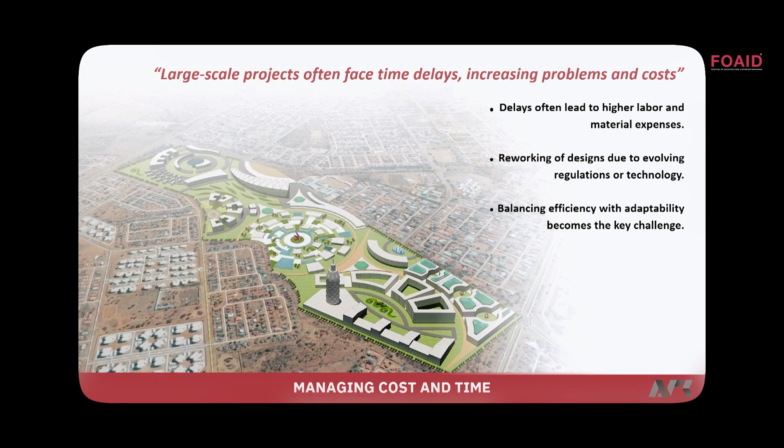Large-scale projects often encounter delays because you've got to go through environmental clearance, a lot of approvals, and during the project itself there's a lot of change. The bylaws change—like the project we were doing, it was in the old DCR, and then UDCPR came in, and we had to change the entire plans.

Because of market demands also, projects have to be reassessed and re-looked at. And whenever you design, you have to keep in mind flexibility. If you have flexibility, you can do the project.

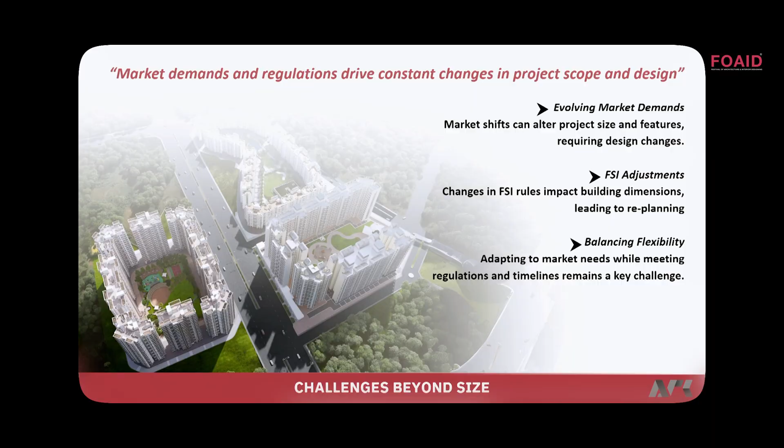The other thing that happens in many cases is you construct something and it gets built, but it doesn't get used for the same purpose. There have been projects where we've done a commercial building and it landed up being a hospital, a school, or a hotel. So you have to have flexibility when you're designing.

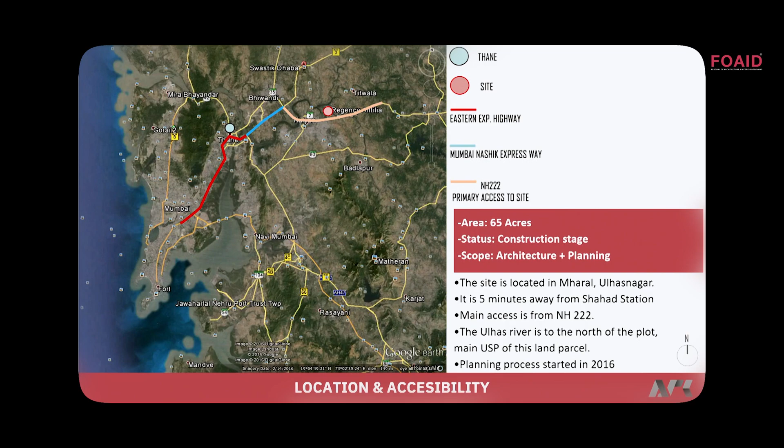This is a project I was talking about, we started this in 2016. It's in Ulhasnagar, actually, away from Thane, on the NH 222, by the river Ulhas. So the site was an excellent site—it's a 65-acre site, and the main thing is the river, a beautiful river.

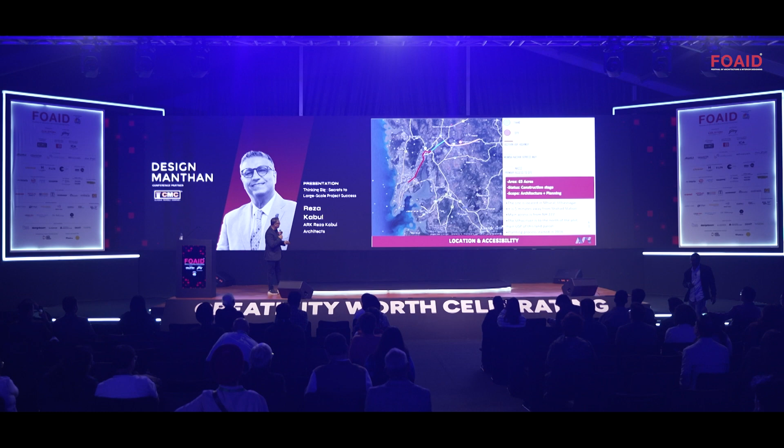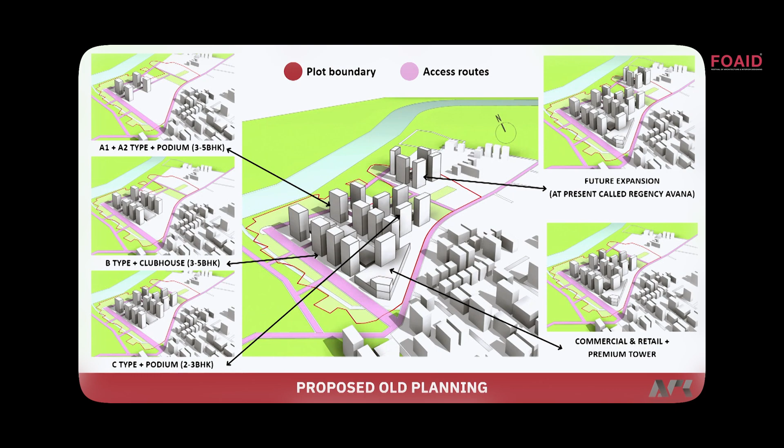When we got into the project, there was a challenge again because it's on the river—we had to leave a buffer zone for the high tide. We looked at the 50-year river high tide, and then we started designing. We had to leave a buffer zone of about 40 meters, and then we started doing the master plan.

So it's a mixed-use complex, and we have residential, commercial, retail, a school, places of worship, and a clubhouse that is 150,000 square feet.

This was the master plan when we started, and this is the clubhouse that is now completed. These are the roundabouts, the thought process and everything that was there, and that was the master plan.

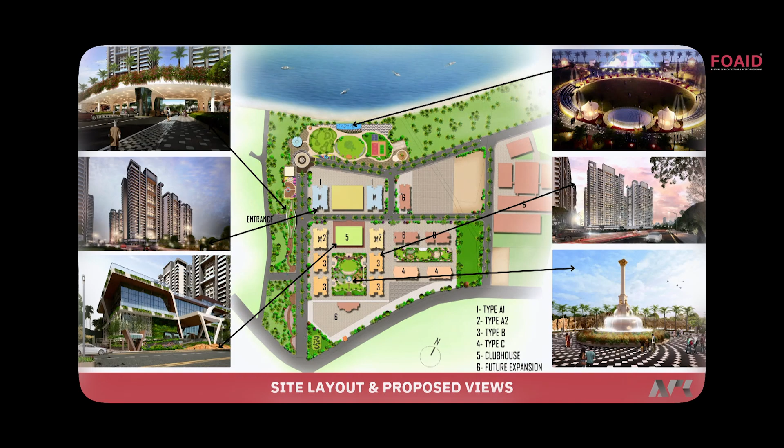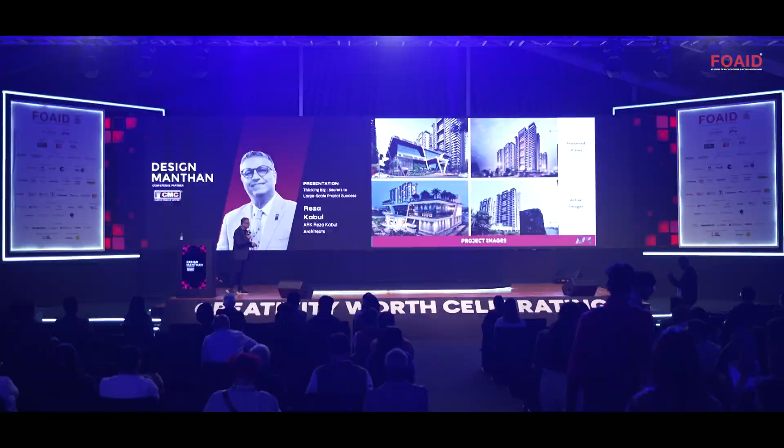The 40 meters of buffer zone we had to leave—along with the clients, we decided to do something there which would be an amenity for the entire project and for the residences. So we created a musical fountain there, we created some putting golf, and we started with the project because he thought it was an out-of-the-way place, so we might as well do the infrastructure first. We did the infrastructure, and then we launched the project.

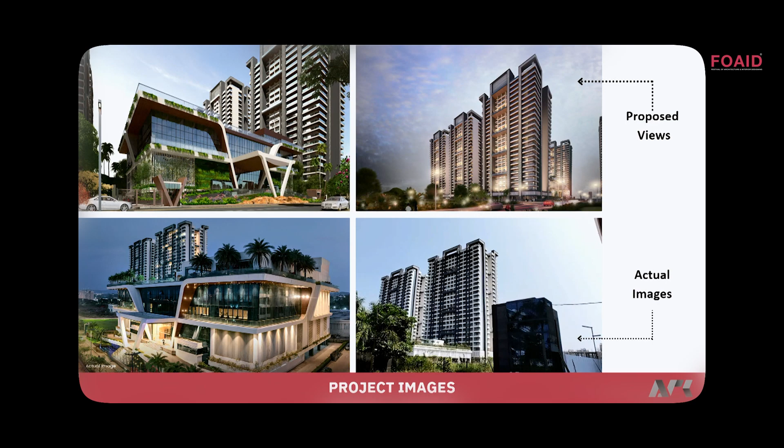This is the view, a perspective image. On top is the clubhouse—that's the completed clubhouse—the proposed residential buildings, and the completed buildings. Again, some roundabouts, the garden landscape, what thought we had, and how we completed it.

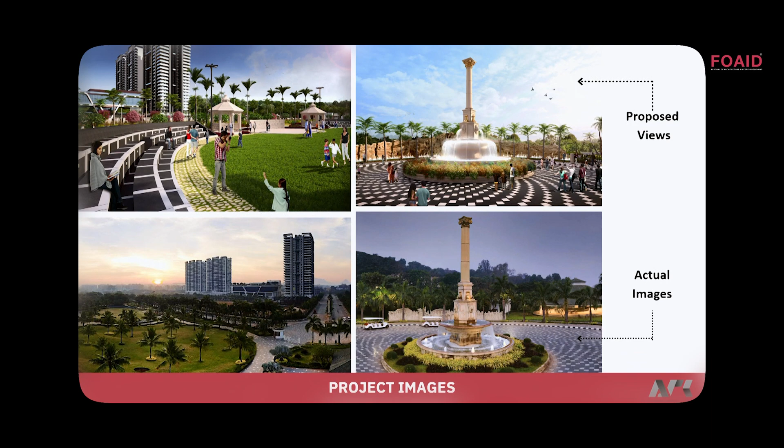The client wanted to bring in the feel and look of the international airport in Mumbai—that was his dream. So we created the gate, an arch shape that you pass through. We have a jogging track that runs around the complex and over the gate as well, and there's landscaping on top of it.

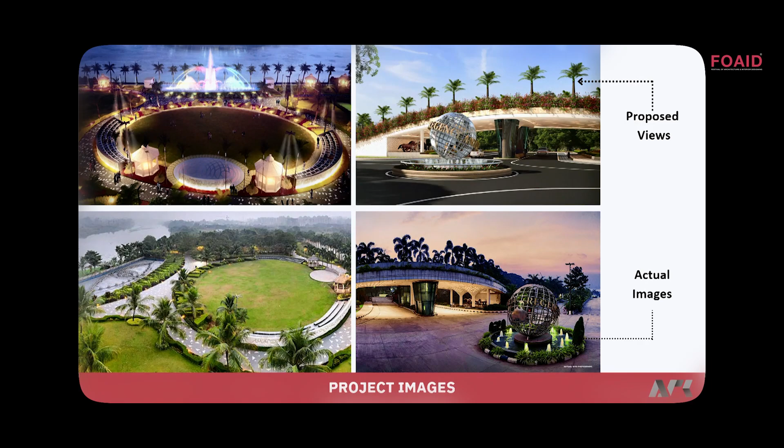You can see the proposed views and actual views—the musical fountain, the gardens, and the clubhouse. We created all these things first before getting into the project, then started doing the building because they wanted to attract people. Nobody would come into such a remote location.

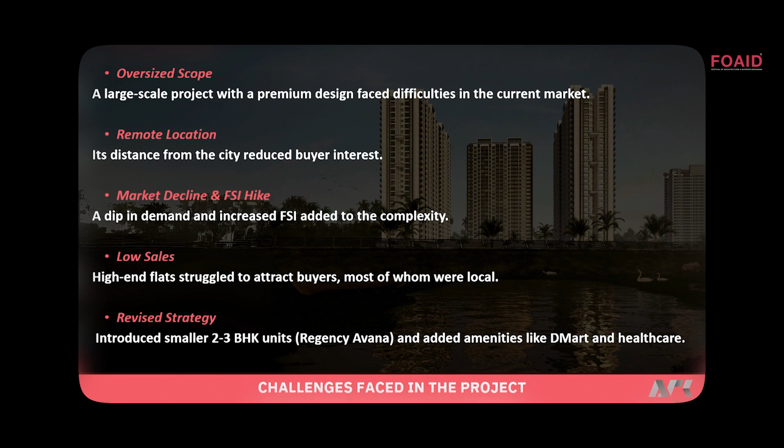Over a period of time, the FSI increased and we had to consume it. The other drawback was that the apartments we made were very large—4 and 5 bedrooms. In this location, people were not ready to move in, and they were not ready to pay the price. So the client started struggling.

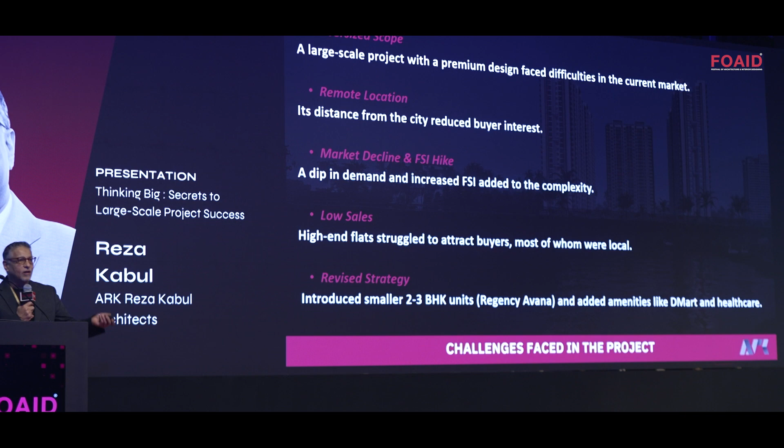So we started doing it sector-wise. Since we had worked it out as a sector, we began doing smaller apartments in that sector. This is something that's completed, and then we introduced this new sector, which is the Regency Avana.

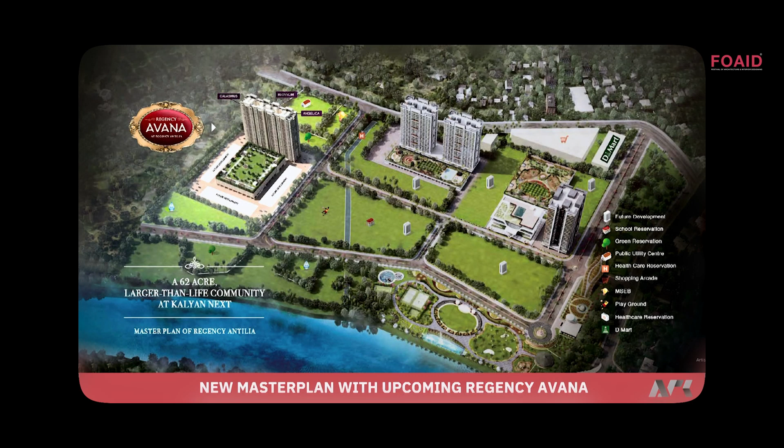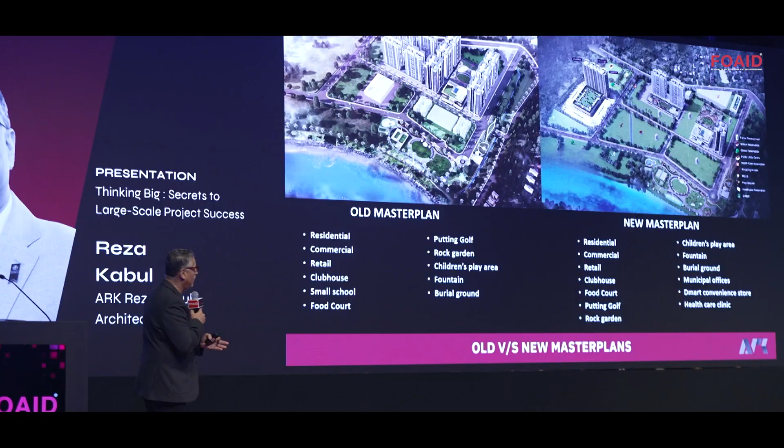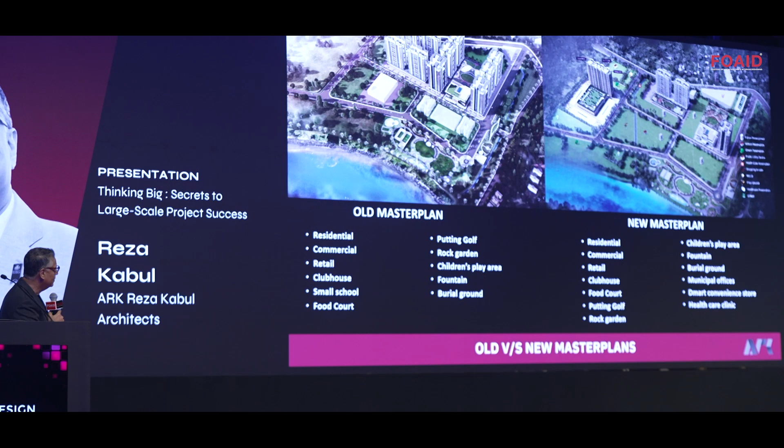Of course, the master plan has all these facilities. The biggest challenge was that there was a burial ground right next to the site, and we had to address how people wouldn't be shooed away by it. But we managed to camouflage it and make it a nice, interesting green space—the clients took it up and we beautified the whole graveyard as well.

What happened is, initially in tower number 6, we had larger apartments, but we had to cut it down and make them into smaller apartments. So the layout became: the left-hand side had larger apartments, and number 6 we had to make into smaller apartments—1 bedroom, 2 bedroom, 3 bedroom.

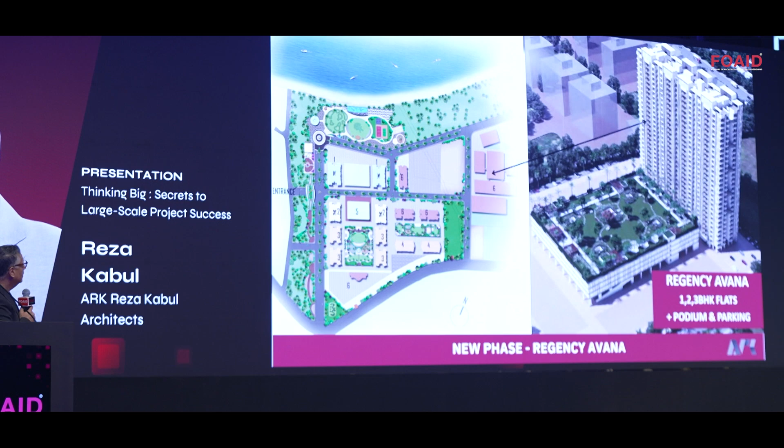So this is how the towers are now coming up. My submission is that whenever you design something on a large scale, you have to be ready for some changes.

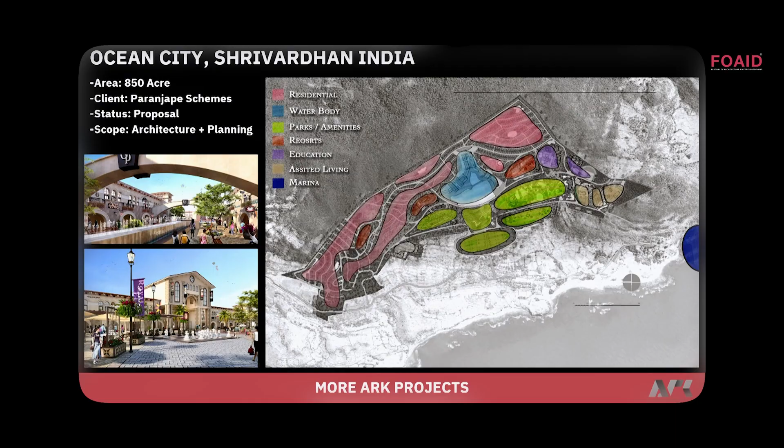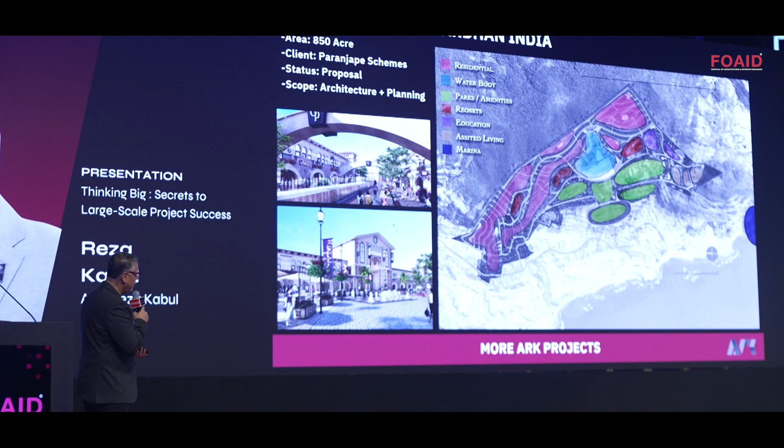This is another project we worked on called Ocean City, in Shrivardhan, very close to Mumbai, by the sea. It's 850 acres and it's a tourism township. Again, CRZ was an issue, but we managed it, and we are on the way.

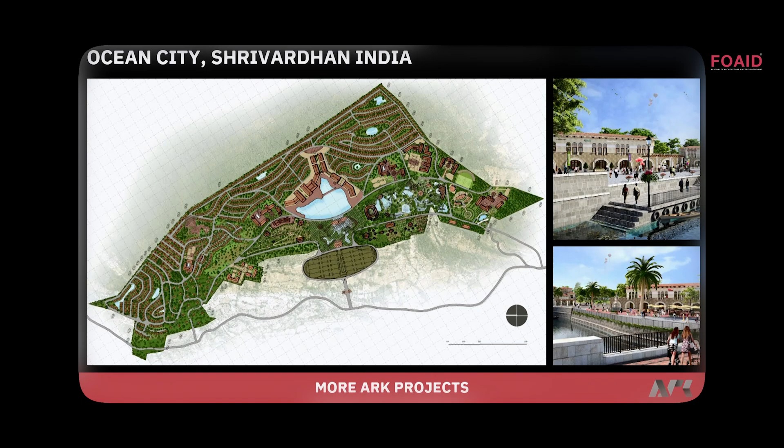This is the entire master plan. But again, here the problem we had is it's got a very steep terrain, and addressing the terrain was a big challenge. We had a central part where we had a total dip in the land, so we've worked on it—we're getting a lake there.

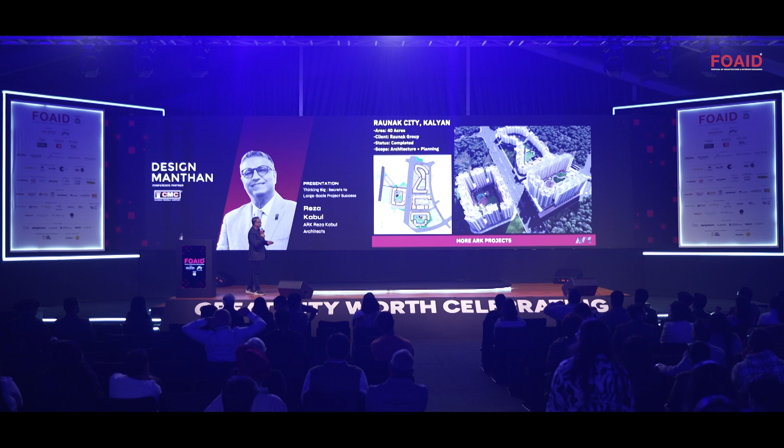This is another project that we have completed now—a 40-acre township in Kalyan, mass housing, low-cost housing. This again had a lot of challenges. Initially the FSI was less, and only 7 stories were allowed. In the second phase, we had to go in for towers so we could consume the FSI, but then the cost was going up. So every project has its own challenge.

But these are the completed apartments, the landscaping, and the buildings.

So this is another master planning township that we are doing. It's 1,150 acres, and it is in Thane.

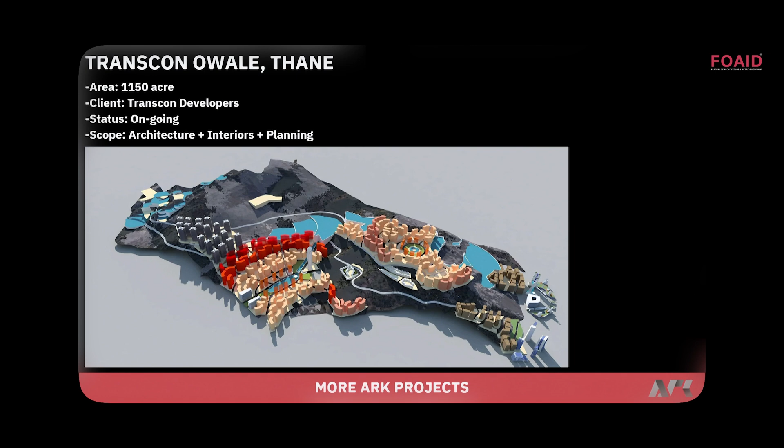Here again the major challenge is the topography, and the other thing is that the land parcel is not contiguous. So you have to have separate blocks, and then we had to address the entire project with commercial, retail, and school, residential, plus consume the FSI, while keeping the environment in place and taking care of that.

So this is just a model. This is a project we did in Goa, on a 12-acre property.

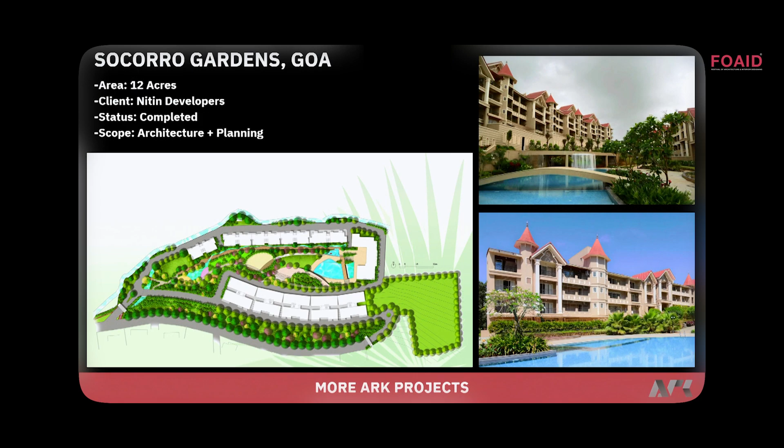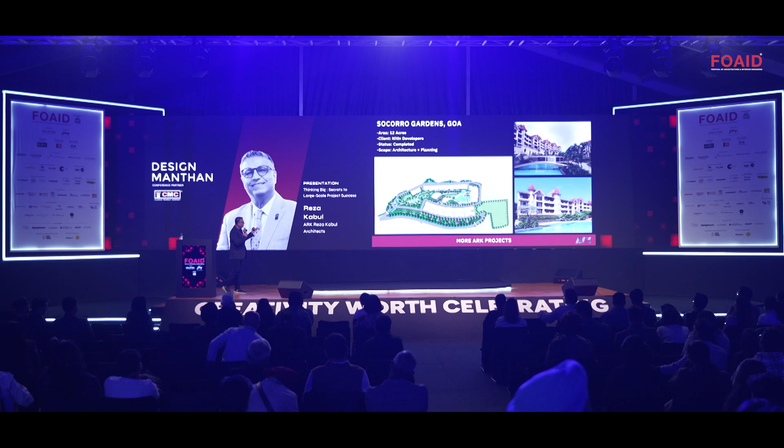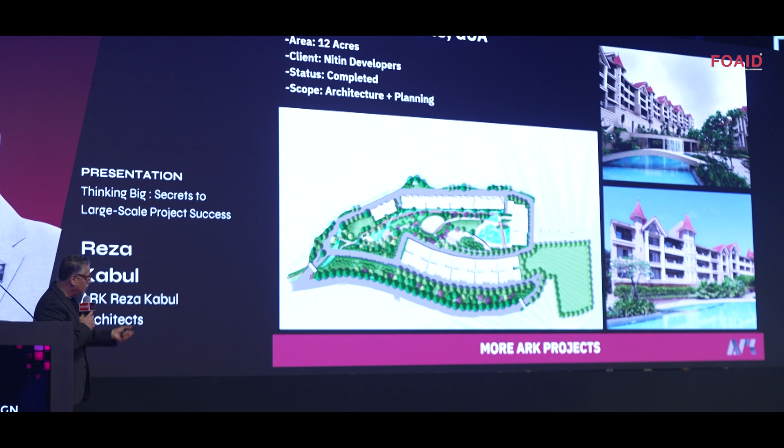And here we had a different challenge. When you see the bottom of the drawing and the top of the layout, there was a 35 to 40 feet difference. We had placed all the buildings towards the periphery and took the entire central portion as a landscape portion, which is a vehicle-free zone. That's the completed images of the project.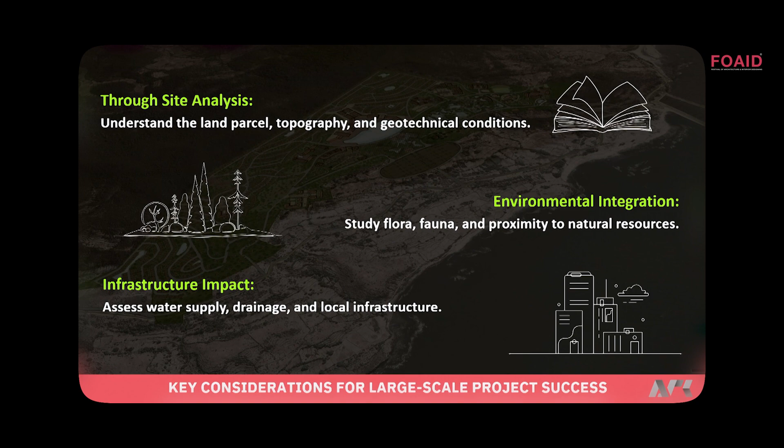When you take up a project like this, you've got to do proper site analysis, study the environment and the infrastructure that is there—how you're going to get water supply, electricity, and other necessary services—and how we can make it sustainable, and build the project while making it sustainable.

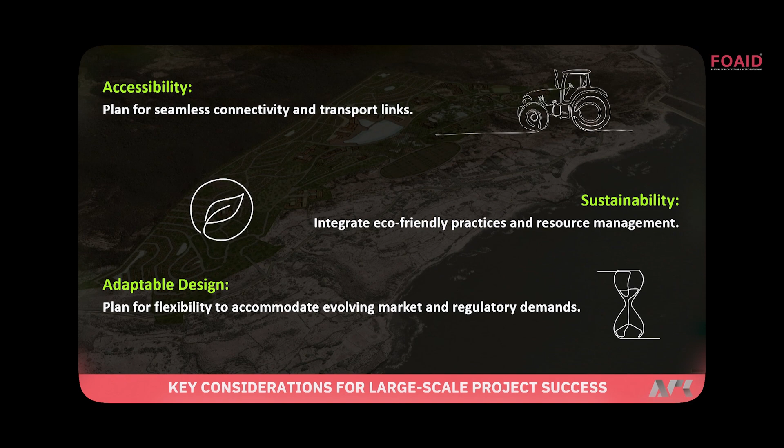So the main thing is accessibility—it should be seamless and easily approachable. There should be some kind of public transport so people can access it easily. We should always integrate sustainable methods, and you should have the flexibility to adapt whenever there's a change in rules or bylaws.

So the key takeaways: adaptability in design, time management, team coordination, and sustainability and future-proofing. These are the main aspects you have to keep in mind when designing a large project.

So this is something I say: to create resilient large-scale architecture, we must embrace change and build with foresight. Thank you.